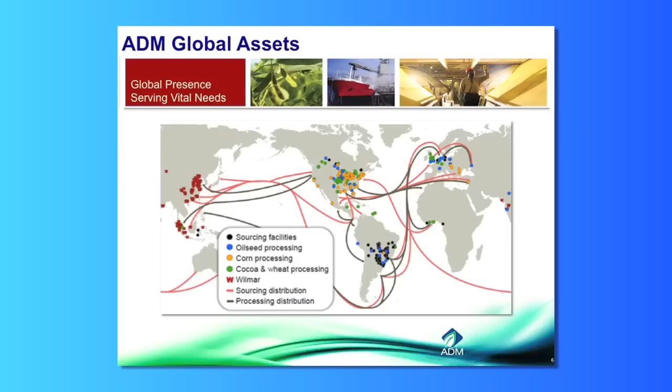This was just a picture of our global distribution and some of our facilities worldwide. Here's a little typo here.

By some research, the estimation is that the population will reach 9 billion by the year 2050. To do that, we're also expected to require as much as twice the amount of food, and the energy produced would be approximately twice as much as today. To do that, though, we obviously have to grow, and we have to grow very quickly. But we have to do it in a responsible manner.

That's really part of our initiative, and that's part of our 2011 Corporate Responsibility Report. This report is available on www.adm.com/responsibility, and it's accessible to anyone that wants to read through it. The report itself documents many of ADM's most important achievements toward these goals, as well as some of the initiatives that I'm going to mention here today.

Let me back up here. So what is this plan, this 15 by 20 plan? Essentially, ADM is aiming for a 15% efficiency improvement by 2020 on a per unit of production basis. The areas of energy and emissions, water, and waste will all be included in that calculation.

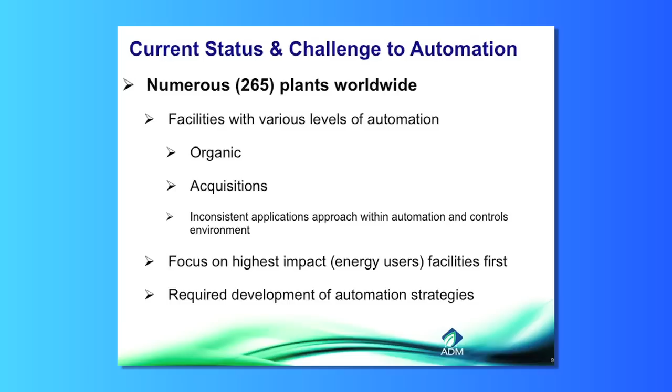So what's the challenge from an automation standpoint? Well, if we have 265 plants worldwide, all of these facilities are at various levels of automation. We have organic plants that we built, we have numerous acquisitions, we have joint ventures. This has obviously created a significant difference in our plants with respect to automation and control.

So within the automation group, for us to participate in this corporate responsibility and the 15 by 20 plan, we really need to develop some automation strategies. We need these strategies for consistent and timely deployment across the enterprise.

So at a top level, we really need to develop a global automation strategy. We need to establish the common goals for these facilities. A key to this is, of course, improved operational awareness or operational effectiveness. We need better information for the decision makers.

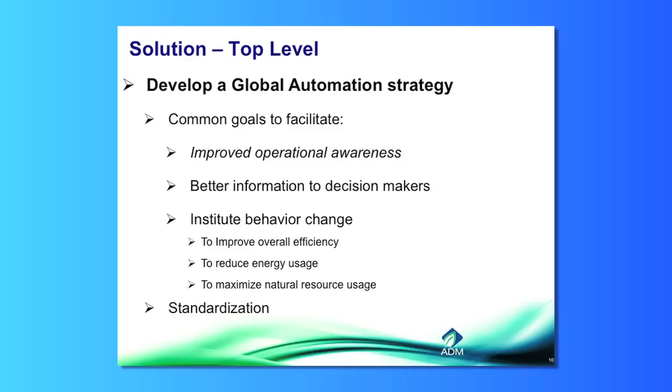We need to institute behavioral change. We want operators to operate the plant to improve overall efficiency. We want to reduce energy uses. We want to maximize the use of the natural resources that we have. That's a big change from the way of an operator just operating the plant and keeping the plant running.

So how do we do that? We really need to create a foundation for how we want to automate and control our processes. Then the what of, for example, these initiatives that I just mentioned, really requires us to do that with the process of this foundation. We obviously need consistent visualization of our HMI.

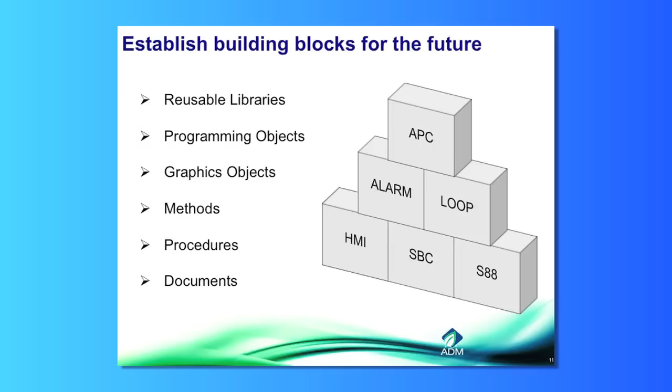We want to control our processes with either state-based control or S88 compliant batch controls. We really need to manage our alarms, we need to optimize our control loops, and we need to be able to apply other tools, for example, with APC, that's shown on the top.

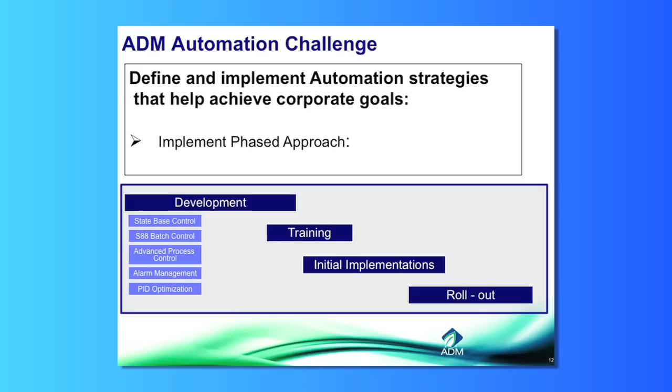So part of this automation challenge, obviously, was to come up with a phased approach to this. There was a development phase, and we worked closely with our DCS supplier, Novatech, to come up with this development. We also developed training.

Within ADM, we really had a great opportunity over the last several years to apply this strategy with 7 major greenfield projects going on at the same time.

Our initial project at a new greenfield plant in Clinton, Iowa, was where we initially implemented some of these strategies. Because we did that at that plant and got that plant started up before the others, we were able to apply this same strategy to all the other plants that we started up.

One of the things sometimes, before these plants were starting up, when we were told that we were going to build 7 plants at the same time, our tendency within ADM would have been, you know, this is going to be a firefight. We're really just going to do things exactly the same we used to do things. Well, the reality was that didn't make sense for us. We knew we needed to do things differently.

So this was that opportunity, though, even though it was an implementation, it was done at a very large scale.

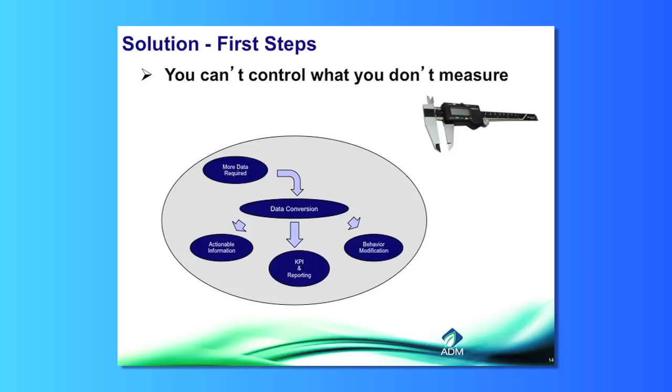One of the first steps, obviously, was you really can't control what you don't measure. We had an advantage within these projects that they were, for the most part, linked to the Corn Division. The Corn Division had an environmental reporting requirement a few years back, and because of that, we ended up agreeing to buy PI as our data historian. Because we had that data historian in place for these greenfield projects, we were already ahead of the game in terms of having a data historian in place.

So we needed more data. The concept of using steam usage, measuring that, measuring coal and measuring gas, were really not new to us. But one of our biggest issues was with the electrical side.

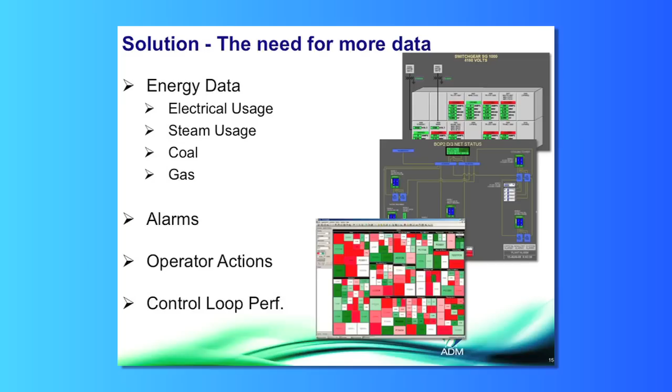With current technology, especially with the use of IEDs, it made that very possible. The real challenge was not only the use of the IEDs, but how am I going to integrate all of that data up into our DCS system and then get it into the historian. That obviously was a big challenge, and we were very successful at that.

We needed to get electrical usage not only from the utility, through our switchyard, through our power distribution, so we could really make better business decisions about the information we had in real time, and we needed to do it at a very granular level.

But we also needed to understand our alarms. We need to understand our operator actions and what they were doing, and also look at our control loop performance. All of these were about getting more data and then doing something with that data.

Obviously we're able to generate reports and get more information and focus on our energy and water usage, again, as part of this presentation. But we're actually better now to correlate that information in a more granular fashion.

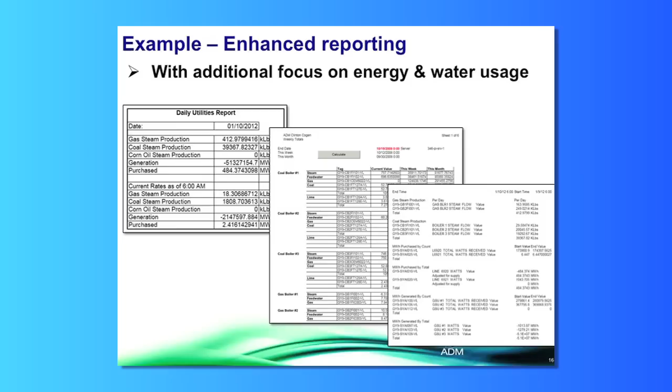That was very critical because we really needed a structure for how we would display our processes to the operators, so there's some correlation between this reported data and the process.

This strategy really led us into the next concept, which is called state-based control, or what I would call unit operations.

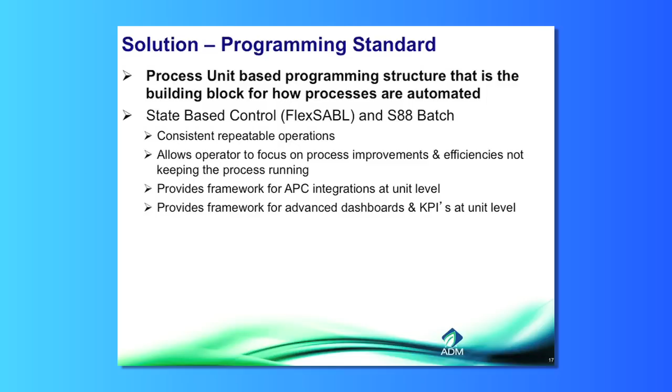So how are we going to do this? We're going to develop a programming standard on how we actually automate and control our processes. We're either going to use state-based control, which is what we within ADM call FlexSABL, or we're going to use an S88 batch programming technique. This allowed us to really focus on the plant as a collection of units from a programming standpoint, as well as visually to the operators.

The intent was to create consistent, repeatable operations. It allows operators to focus on process improvements and efficiencies, and less on keeping the process running. It provides a framework for advanced process control integrations, and additionally provides a framework for advanced dashboards and KPIs at the unit level.

This next slide is what we call a state transition diagram. It's part of the process of doing this state-based control. The nice thing about this is it not only helps the automation teams with the programming, but it's really an easy way for engineering, operations, and automation folks to communicate about how they want their process to run and what they want it to do.

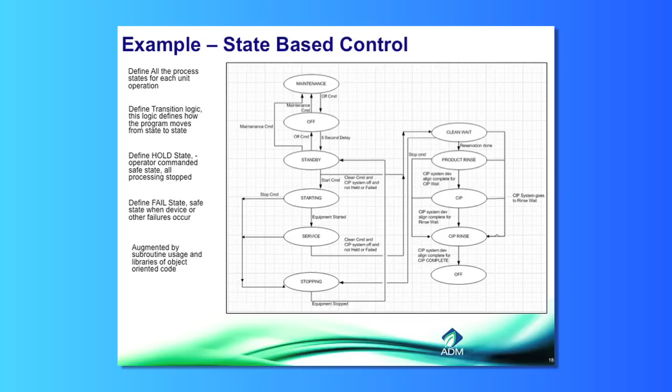Because of the way we did our programming, when you get your most efficient sequence out of that CIP, you apply it to all your evaporators or all your heat exchangers. That small gain achieved on one heat exchanger is now gained on every heat exchanger in the whole facility. So that small bit you thought you got on one is really multiplied by, who knows, 50 to 100 times. It's very powerful.

Another thing with state-based controls, we really wanted to display the process in a very different way. We wanted to build a hierarchy for how the operators can not only visualize but also operate the process. We still have the P&I drawings, the unit graphics are still available, and they'll complement this type of unit display.

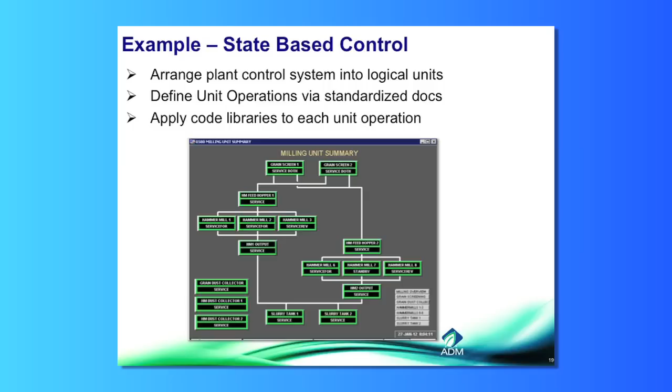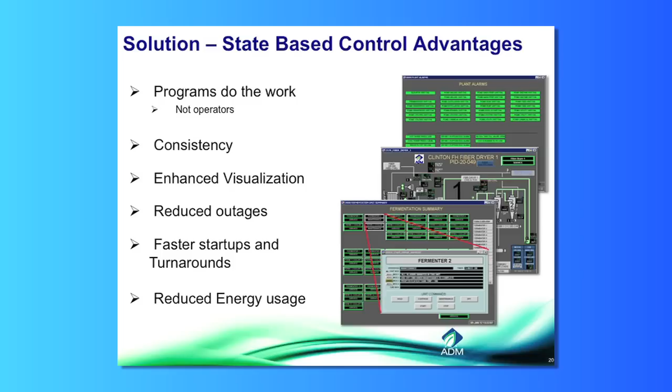So what's the advantage of state-based control? With the programs doing all the work, like the continuous checks and steady state checks, operators can really concentrate on operating at the unit level instead of the individual control loop level. Operators can also visualize and focus on process improvements and enhancement at the unit level. These improvements are directly related to ADM's 15x20 initiative. Startup and shutdown sequences can be optimized and improved, and that would increase your equipment availability and, in essence, reduce your energy usage.

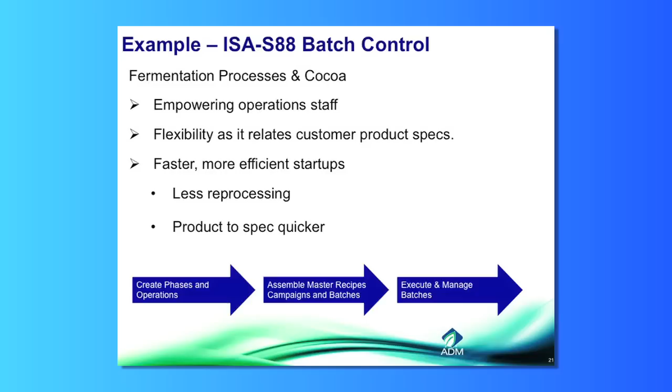In some of our plants, we really couldn't do state-based control. We needed an S88 solution. In a lot of our fermentation processes in our cocoa plant, we needed to empower our operations staff to make better decisions. We needed a lot of flexibility with respect to customer products and product specs. We need faster, more efficient startups, less reprocessing, and to get the product in spec quicker. In reality, every one of those items is really about being more efficient with your energy and water usage, and if you have less reprocessing, there's a tremendous benefit and value there.

So back to some of the building blocks I talked about earlier. We talked about state-based control and a bit about S88. So what about alarm management? How in the world do you want to talk about alarm management and say that relates to energy? Well, it's really about improving operator effectiveness. That's the key. We want to reduce nuisance alarms in a way that we can actually define alarms differently.

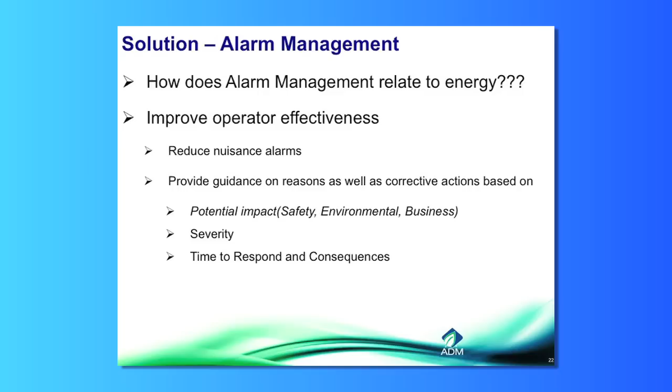Within ADM, within the corn division, we've defined 3 potential impact areas: safety, environmental, and business. Within those 3 impact areas, we define 3 levels of severity: minor, major, and severe. I'll note that in the potential impact category of safety, there is no difference between minor, major, and severe. There's also no time to respond or consequence — the response time is immediate. So that one is a very special category, of course.

So the concept is, once we can manage alarms in this way, we're going to respond to alarms in a very different way as well. In terms of energy, for the most part, that's going to be a business impact, and the plants will be able to address that on their own terms in terms of what value it is for them. Obviously, on the environmental side, emissions is part of that, and it's very critical as well.

So what are the steps in alarm management? We're following the 7-step process for effective alarm management, following ISA 18.2. The first step is to develop an alarm philosophy. We've done that in the Corn Division. We're currently in the alarm analysis and alarm reduction phases, and working toward the documentation and rationalization phase, where we'll allow operators to find the alarm in these categories I defined — business, safety, and environmental. They'll be able to click on either the alarm screen or the graphic screen and immediately see a display of what they need to do, how much time they have to respond, and what the consequences are.

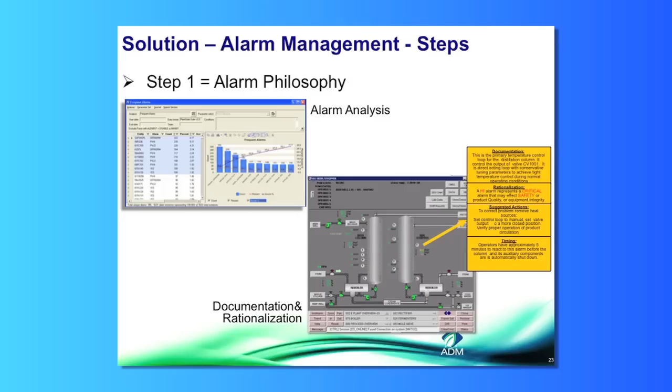Another component of this building block is loop monitoring and tuning. We really need to provide tools and methods to improve our loop tuning and loop priority for the plant. This affects production, quality, and efficiency, and we're intended to tune loops now for optimal efficiency, for maximum performance, and to maximize device longevity. This also has a great impact on our energy reduction initiatives.

Having said all of that, these component building blocks really step us into a whole different game. But it's very important to note that within ADM, especially if you're thinking about APC or already doing it, we want to make reasonable attempts to ensure we've done everything we can on the process and automation side before applying APC. Because when we justify an APC project, we want to apply the ROI on the APC solution itself, not on other improvements we might have made. We want to base the improvement on the APC solution.

In terms of specifics, we've applied APC solutions on distillation columns. We've had significant reductions in steam usage. I can tell you the ROIs are probably in the range of 6 to 9 months for an APC project on a distillation column.

We're currently working on improvements to our coal boiler efficiency. Part of that is on an individual basis, but also on optimizing the individual boiler balances so that the most efficient boiler operates at the highest efficiency, and the other boilers are staged accordingly. Part of that is also going to be to improve emissions.

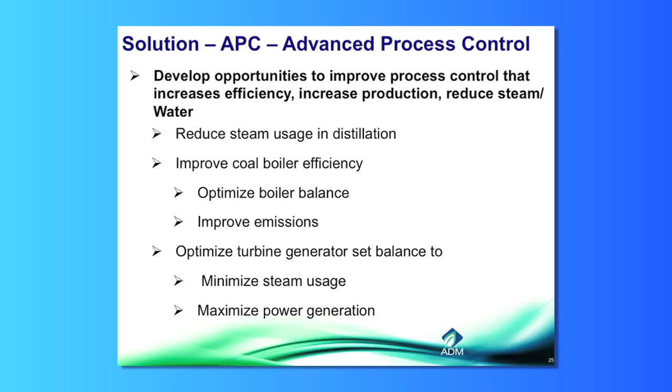We have a lot of cogen facilities within ADM, and if you can reduce your O2 a very small percentage, you're going to cut down your fan amps, your energy usage, your emissions, and it's going to have a very significant impact by applying this APC solution. If you talk to me in 6 months, I can probably tell you what that ROI is, but it's probably going to be less than 6 months.

One of the other initiatives is after we do the coal boiler, we're going to look at whether we can optimize our turbine generator sets as well at these cogen plants. Again, we want to minimize steam usage and maximize power generation.

This is just a bit of a visualization of our APC advanced process control with some of our process control DCS graphics, and I really don't need to spend much time on that.

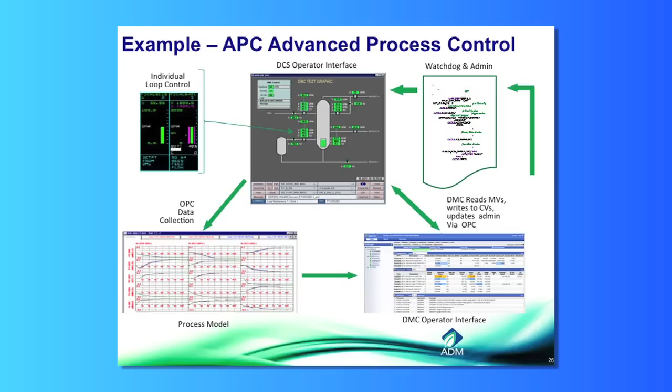So what's our current status? From the state-based control portion of things, we're really trying to continue and improve and refine that as we incorporate additional plants into state-based control. People are always coming up with additional ideas, and we need to honor some of those great ideas and incorporate them into our standard.

From a training standpoint, I was in Europe last summer and trained colleagues there, and they've pretty much accepted that state-based control is going to be their de facto standard. They've already moved forward with applying state-based control on most of the oilseeds plants in Europe, and they're moving very aggressively to migrate all of their existing code to state-based control. They've already seen a significant benefit there.

We also have rollouts ongoing, and we're looking at opportunities where applying that strategy will have significant benefits, because we don't have opportunities to shut the plant down, so it requires a significant amount of effort. But where we have opportunities, we're taking advantage of that. Within the corn division and oilseeds division, we have ongoing projects continuously. I also want to note that we're applying this strategy to a couple of pilot plants we're working on currently in our research department.

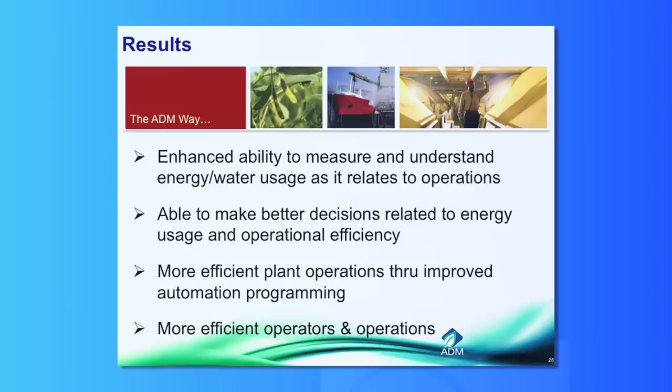Any new initiatives that happen to come about at ADM, we believe we've created the foundation within our automation to really be able to react to any new initiative that comes about, just because we've taken the time to build these and create these building blocks. Thank you for your attention, and that's really all I have today.